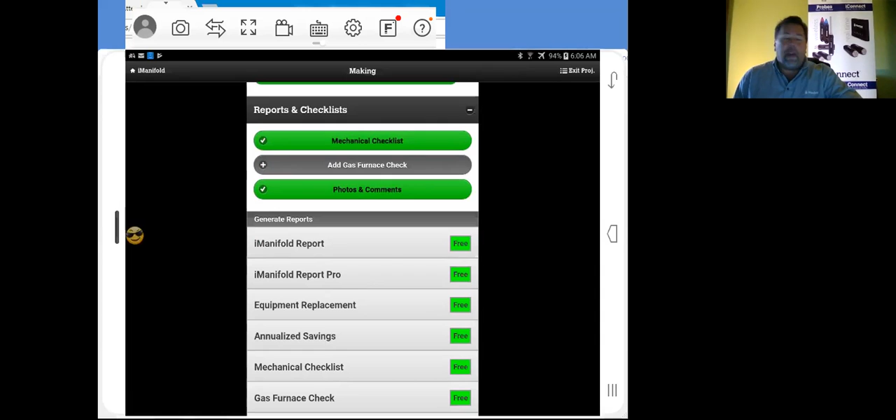Showing performance is another page in your offers here. We'll take a look at an iManifold report. Now, this is just a basic report that you can show to your customer.

As you can see, you've got measurements in and measurements out. Measurements in are basically what the system was doing when you arrived on the job site. Measurements out are after you fixed it. So you're going to want to show your customer measurements in for when they're taking a look at it.

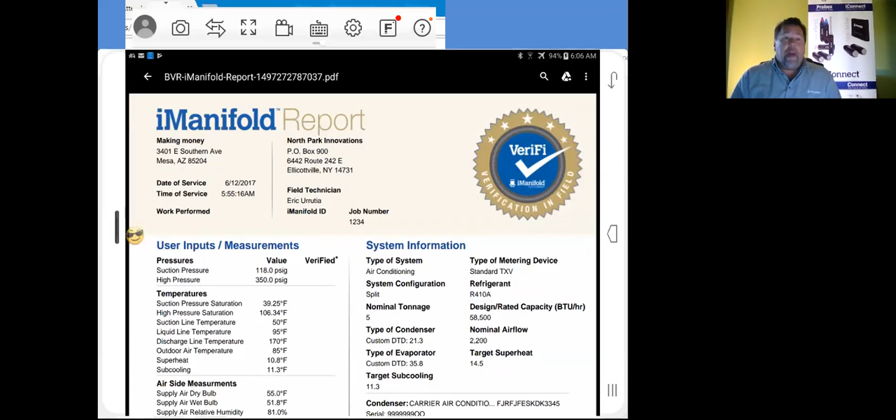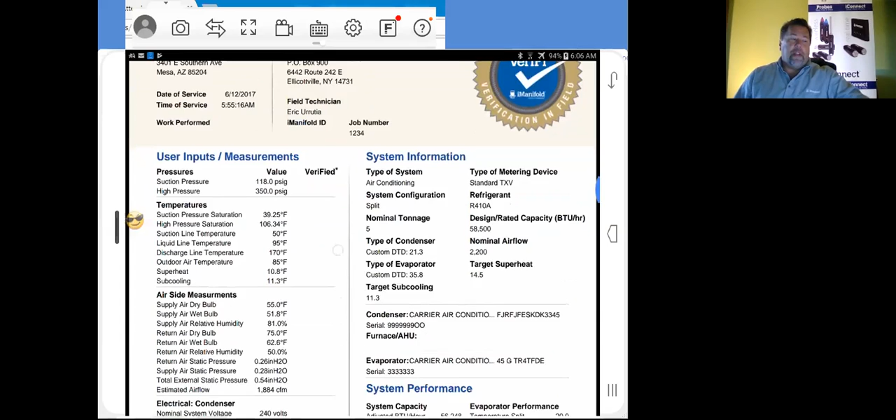We're going to generate this report right quick. Here's your report. Now, I generated this without being hooked up to a system, so all the way down this line on verified, you're not going to see check marks. Hooked up to the iManifold or iConnect, you will see those check marks there. But as you can see, all your pressures, your temperatures, air side measurements, everything's there. The proof's in the pudding.

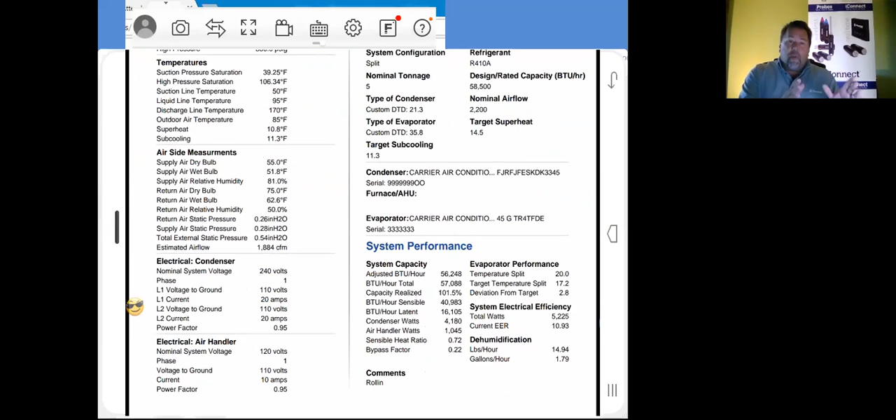It's not just a technician scratching something down on a pad or at the base of the invoice. And we all know the proof's in the pudding. If it's done professionally, nice form, people like to see that. It's a lot more professional and a lot easier to look at.

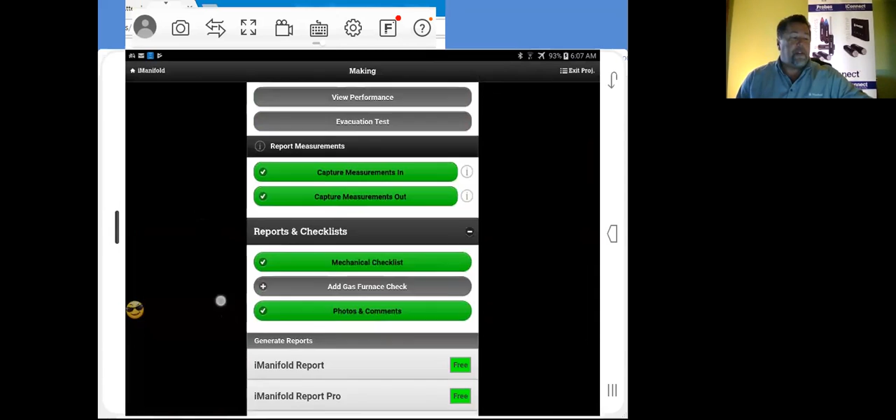We're going to go back into another nice report. This is where it comes into play, showing what you did, how you fixed the system, and what their system's doing before or after. We're going into the charge and airflow report. It's a very simple, nice, personalized report, and you can put your logo on it.

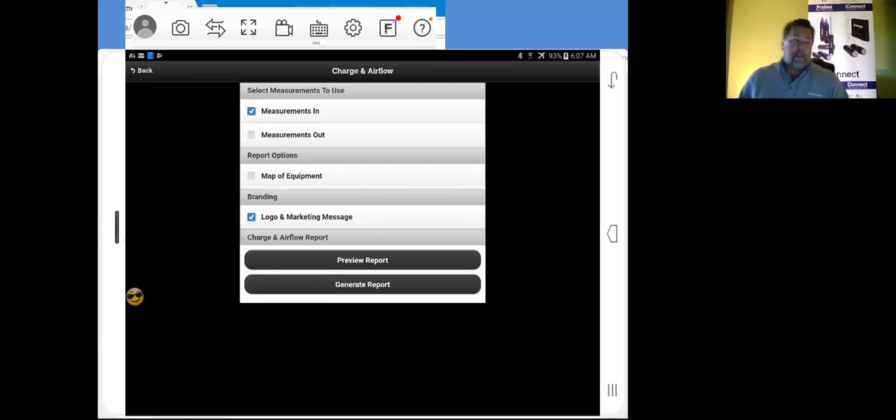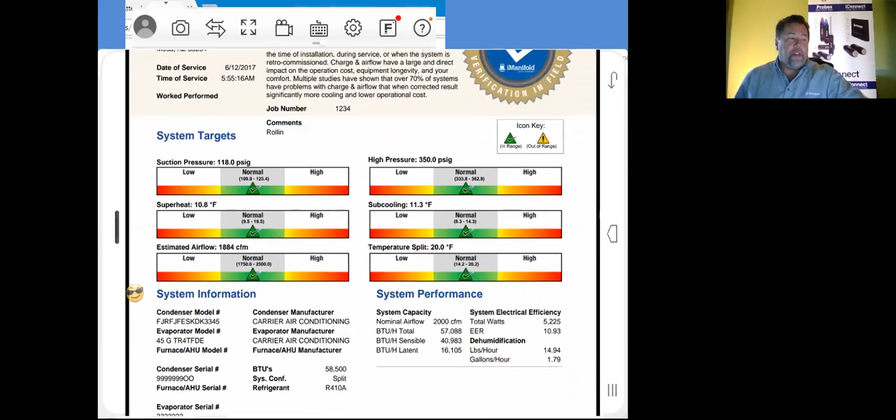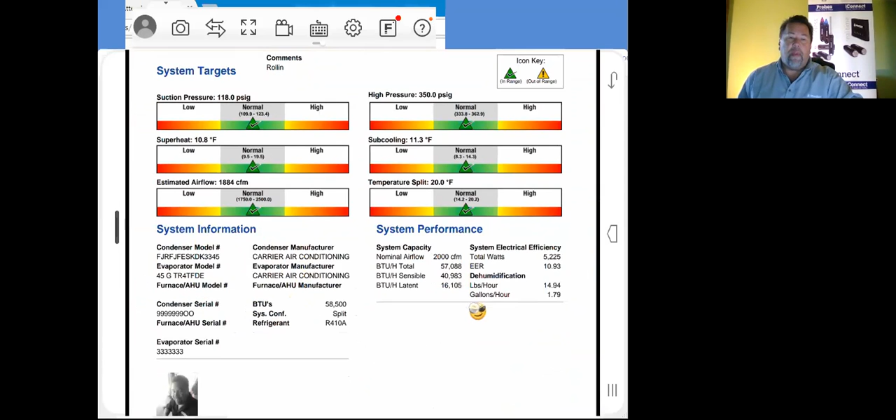We're going to take a measurement in. This is when the system wasn't running so great. That's how quickly these reports generate. As you can see, the system was running really good. All of your measurements here are falling within the norm. There's all your model and manufacturing information. Your system performance is also shown, and you've got your serial numbers and everything in here.

Now let's go back. Probably one of the best reports we have that will make you money is the equipment replacement report. Equipment replacement reports take your measurements in and your measurements out after you've done a tune on the system versus replacing the system. So let's take a look at an equipment replacement report. We're going to generate this right now.

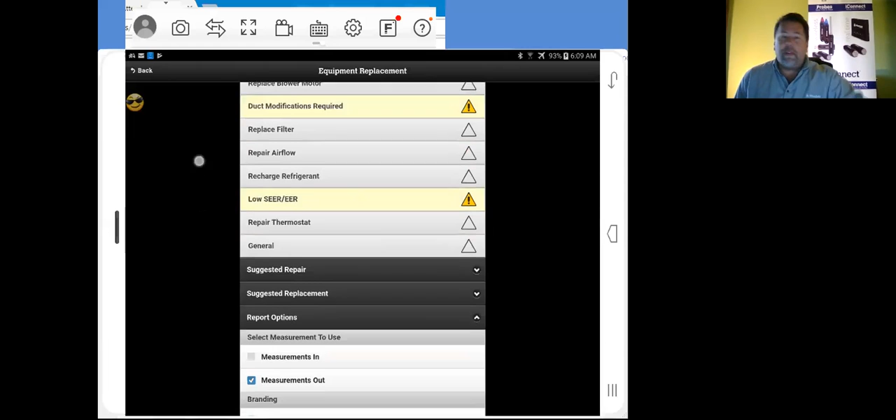Problems are listed up at the top here. You've got a whole selection of what you need to do. You're talking to your customer even after you've tuned it, saying, well, you've only got a limited amount of time on your AC, we need to repair that, we need duct modifications, and we've got low SEER or EER. That's contributing to why your system's not running that great. Then there's the suggested repair.

Now the SEER after the repair, we all know it's not going to be back up to par. We'll just say it's going to run at 8. What is the repair cost? You did a capacitor, a few things that you tweaked around a little bit to make it run a little bit better. That repair cost, we'll just say it was $900, and that's actually pretty light for a decent repair.

Now our approximate unit age, this is going to be a telltale thing as well. We're going to put in that this unit is 12 years old. As we know, most of the time, depending upon your part of the country—here in Arizona—systems run between 10 and 15 years at the max before they're just deteriorated.

Now we can go into your suggested replacement. This is where your technicians, if you have sales books, go out on the job—if he's going to upsell them, sell a new unit or what have you—he'll have most of this information in his sales book. So we'll go to a recommended SEER of a high 18. Select your manufacturer—we're just going to use Carrier as an example. Model number: put in whatever model number here and match up your tonnage, or if it's going to be upsized or downsized, depending upon what was there already.

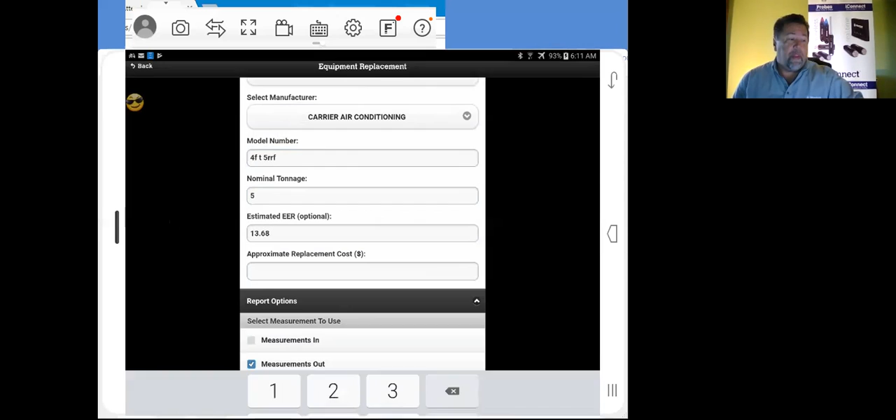Replacement cost: we're going to go $10,000. We're going to go off the measurements out, and we'll generate this report.

Oh, I've got my smiling face over here—that would be your actual logo that gets put in right here. Customer information right here, your company information right here.

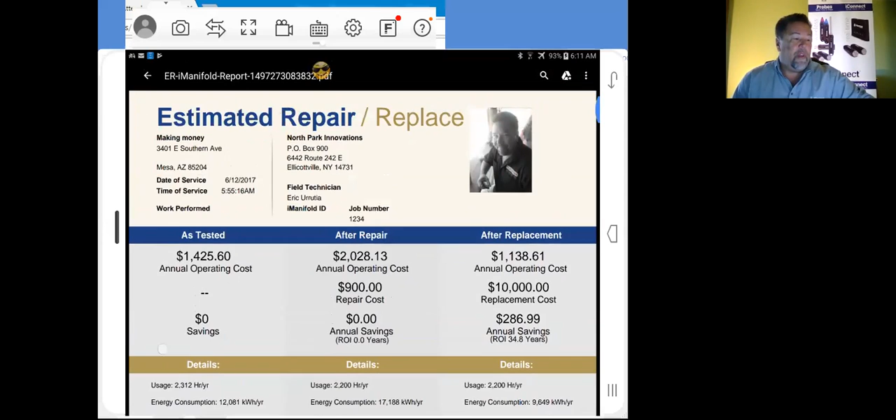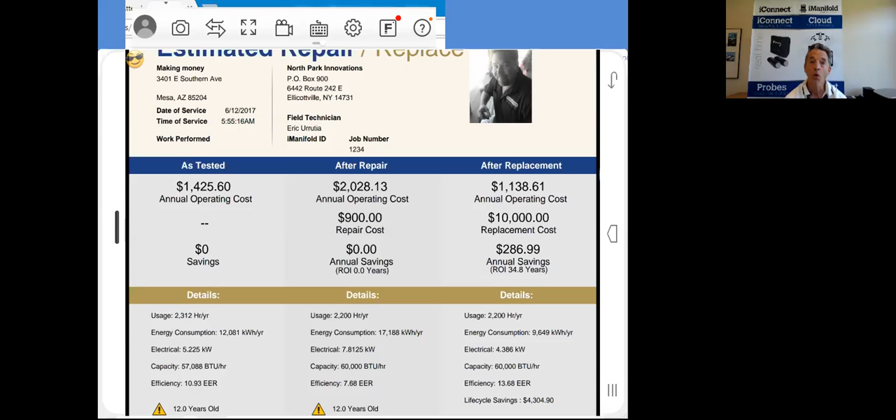Hey Eric, there's one thing we want to stress to everyone, because there's been some feedback that there's a lot of people in the industry all about trying to upsell. Yeah, and the beauty of our system is you can really quantify the operation of the existing unit as it is today, and then project what the new one will be. So it takes a lot of the unknown out of it for the end customer. We think it raises the bar a little bit as far as the quality of the sale and the promise of what you'll receive.

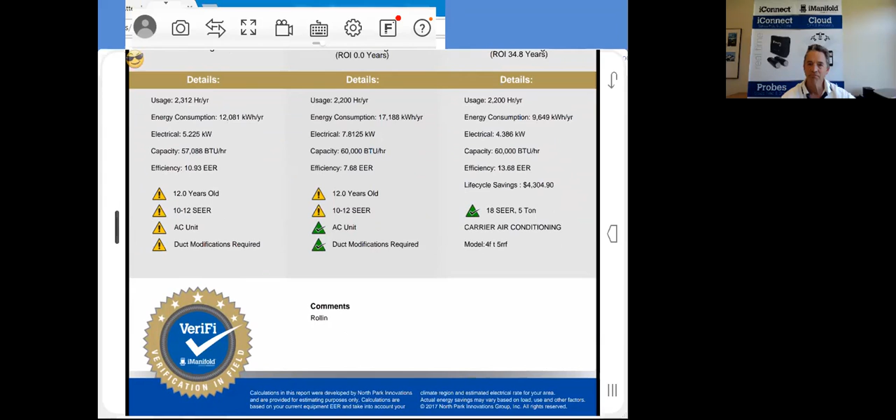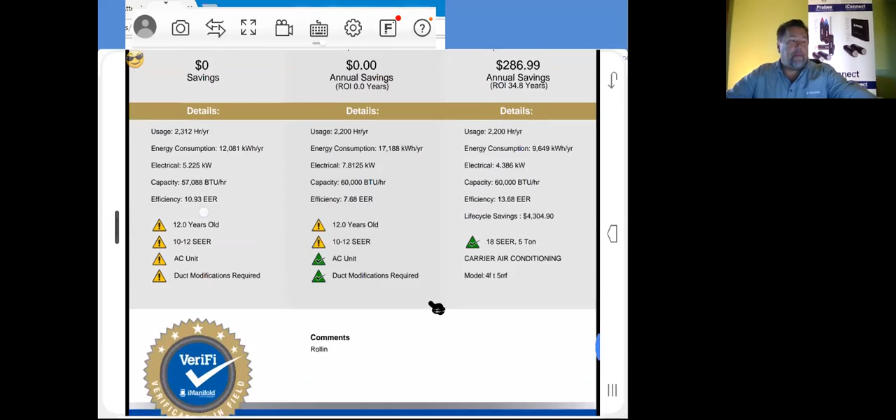Correct. But on this report right here, it is showing—let me get back on here—exactly what we've got. Now I just threw some measurements in here, of course: as tested, after repair, after replacement. When you're actually working on the system, I just threw in numbers here. You'll be able to see as tested, after repair, which is actually going to be better than as tested, and then after replacement, you're better than as tested when you started off. So with this, showing the customer how much he's utilizing right off the bat.

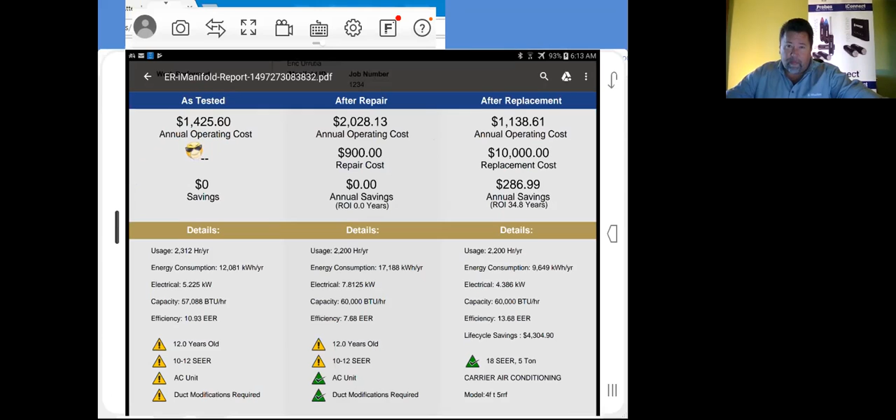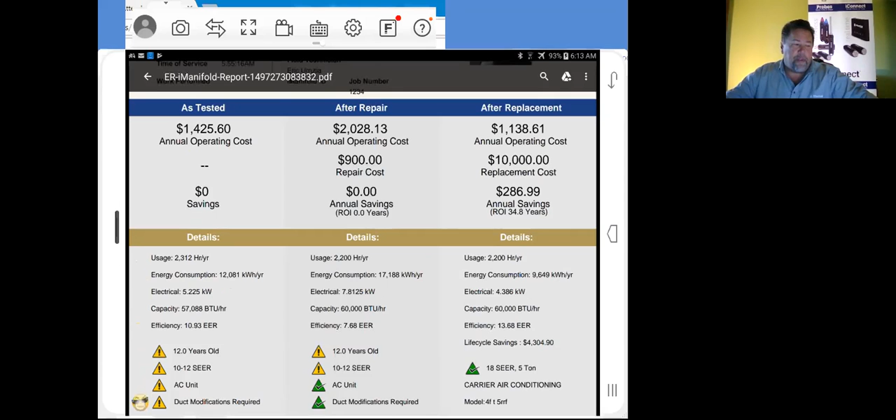Now our next session, I'm going to hook up to a system, make it run inefficient, then we'll put after the repair and then after replacement, so we'll have better info. Sorry about that, everybody. But showing the customer where they're at, and then after replacement, these are your benefits that you have here, your details, your energy consumption on this. And so that's a good example, Eric, where it shows, hey, it's a 34-year payback. So you do well to fix it.

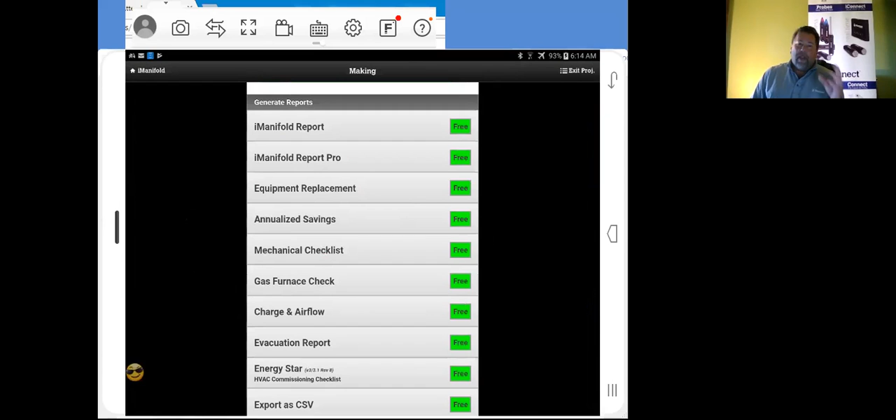Yeah, and normally, like I said, with proper measurements in there, sometimes it's going to be a 34-year payback, sometimes it's going to be a 10-year payback. Right, just all depends. Just all depends.

Now, there's another report here for annualized savings. This is a really nice example when you just did a repair for a customer. They had some pretty catastrophic things go wrong, or even the slightest little things go wrong. We can take a look at annualized savings.

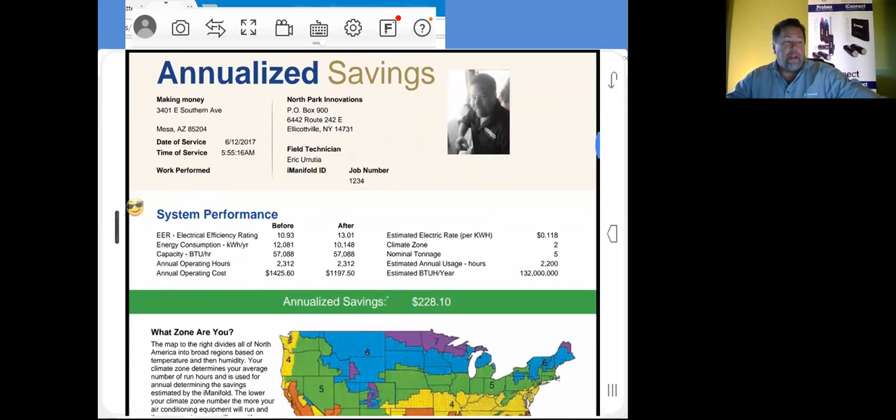The annualized savings report here shows where your system performance is. Before, we're running at 10.93 on the EER. After the repair, we're at 13.01. Annual operating cost was $1425.60. After the repair, it was $1197.50. So annualized savings, we're looking at $228.10 on this particular one.

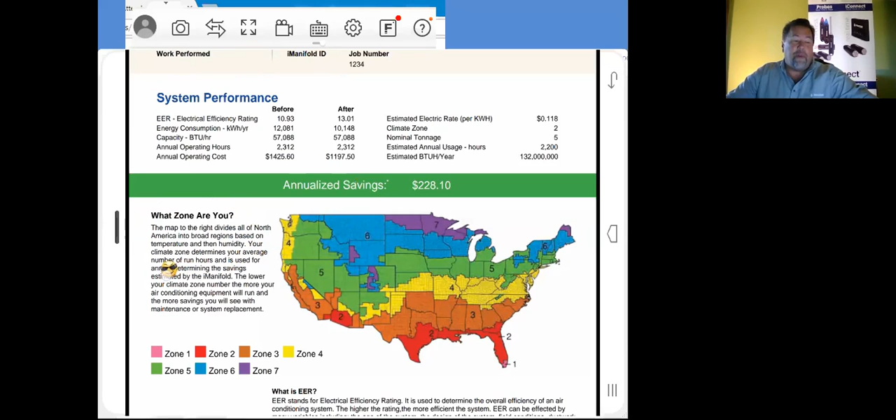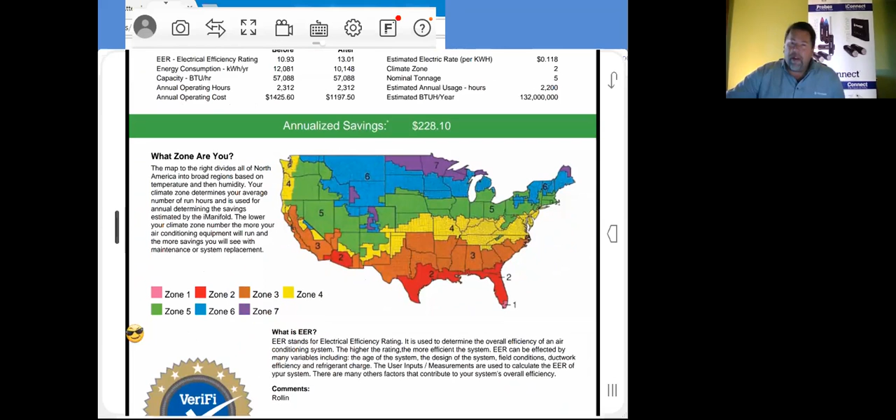Now, mind you, I'm going to have a better example next time around. I apologize, I threw in some numbers here, and they weren't exactly the most accurate numbers by any means. But this will give the customer a little information of what zone they're in, so they can take a look at where they are on the map, and also it gives a brief example of what is EER, so they understand a little bit better. We're just giving enough information where they can be a little bit dangerous.

Let's go back in here. Now here on the bottom, you'll see there's an export as CSV. This is really nice because if you're using some dispatch software, whether you're a Service Titan guy, ESC Desco, there's several different ones out there, or even if you're using your own, exporting this information as CSV, this is a Microsoft Excel friendly file.

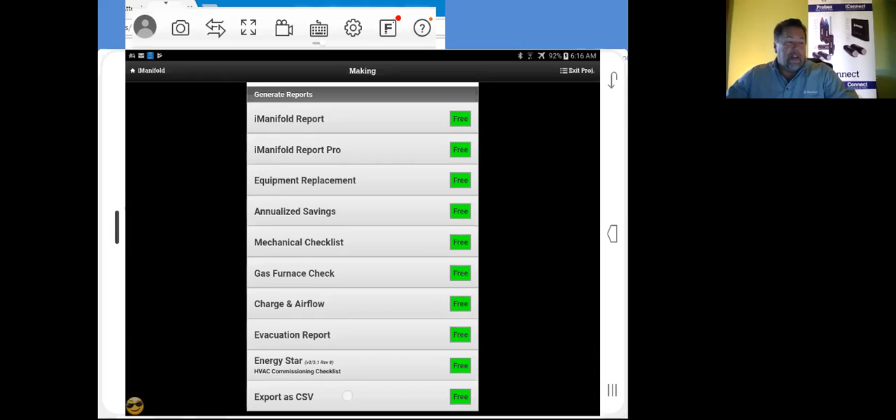We'll take a look at this real quick. We've got a choice between measurements in, measurements out. We'll just say this is after we did a little repair job on it. This can be imported onto your actual tickets or invoices that you're sending to the customers, and you can save it for your information as well. I know this might look kind of funny, but this is going to be the information that gets sent out.

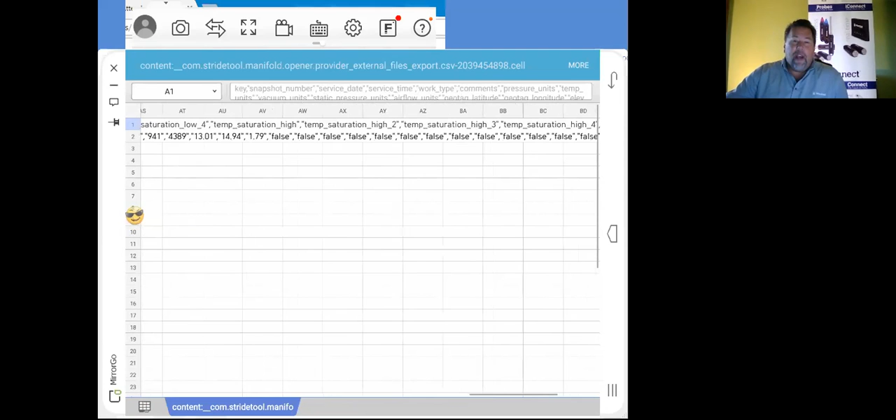We can expand on all this. All this information up here has a meaning, and it can be imported into your system. All these measurements, your geotagging, everything gets imported into your software. So those of you that are IT guys, that's an easy one for you to take a look at.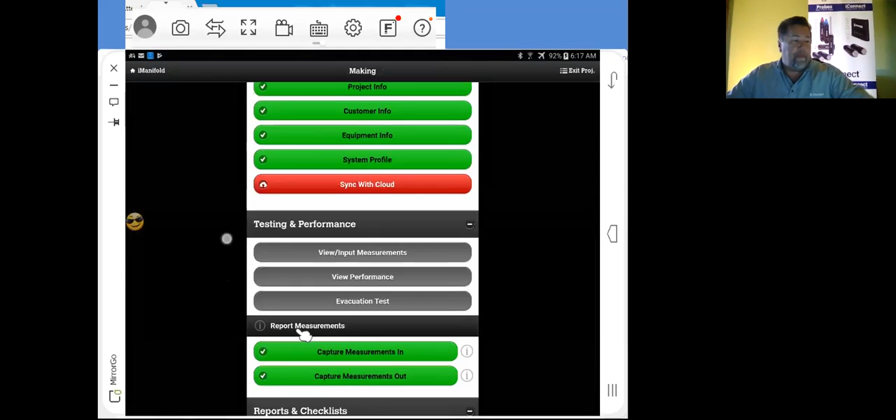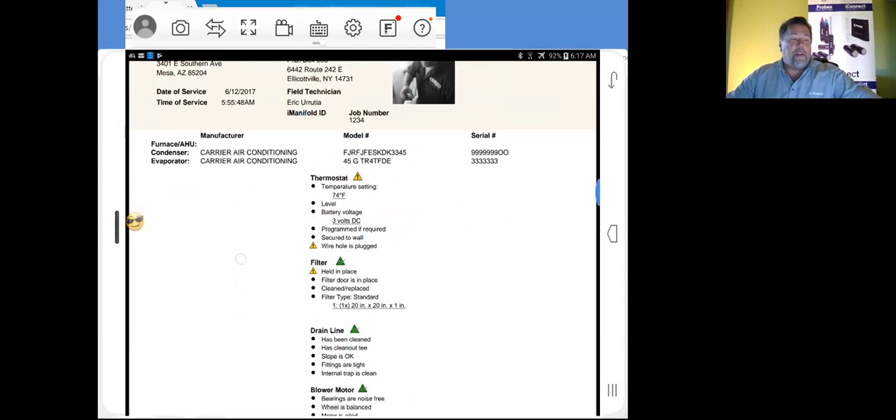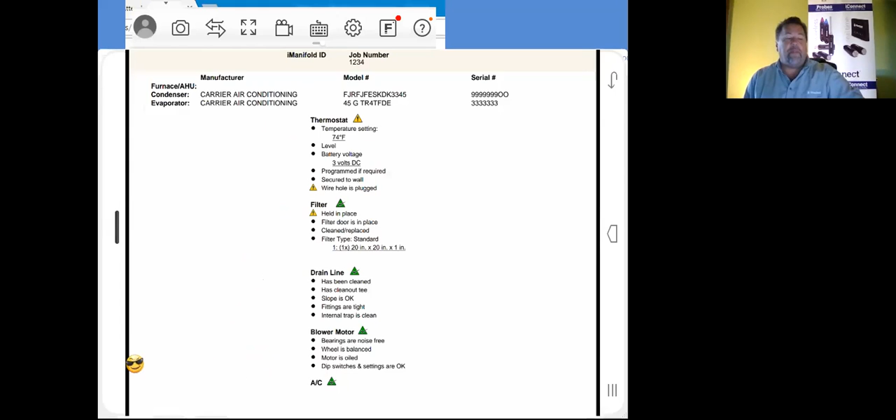We also have a mechanical checklist report. This basically goes over everything that's inside the building. I just did a little example using carrier information, made up a model number, put in the serial numbers. This is going over the thermostat, the filter, the drain line, blower motor, and a bunch of other items on here. You can go through quite a few items.

That'll give the state of the system inside and out, from the looks of the furnace, the heat pump, the AC, line set, filter sizes. As you can see, we've got our filter sizes in here. If there was a belt on the air handler, it gives you the option to put in the size of the belt and the number of belts. That way, for maintenance and everything else, you know exactly what's in that system before you ever even go back to it.

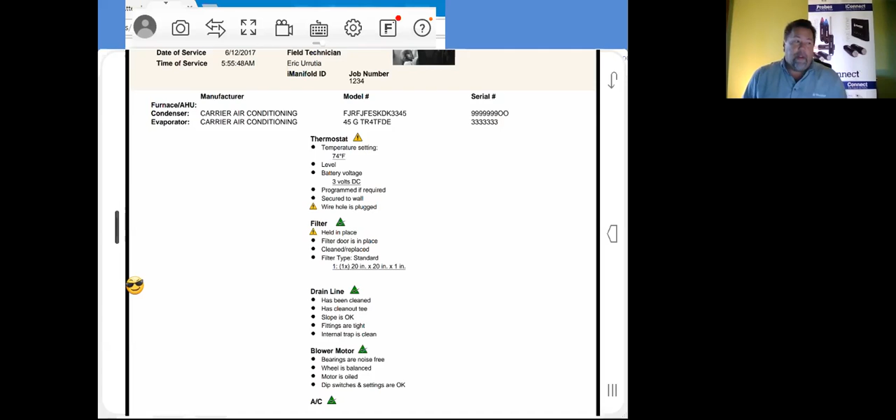Very nice thing there. Now, the way we discussed before, the beginning of this, how the iManifold can actually pay back, it'll pay for itself in a very short amount of time. And also, this is where it's going to generate you the most money.

We're going to talk about callbacks. Callbacks are a major issue that you have in the service industry. Callbacks cost you a lot of money. You can all think about how much a callback will really cost you. A lot of contractors don't even know. If they're a medium-sized contractor, they don't pay attention to it. They just send their guy right back out, get the job done, fix it, move them on.

Well, how much did that actually cost? Figuring the cost of his hourly wage, the truck, the insurance. The main thing is the lost revenue of the job he could have been doing instead of going back and making that call. So these run into several hundreds of dollars for each one of these callbacks. But the contractor most of the time will not even really feel it because he's not pulling money out of his wallet, wadding it up and throwing it in the trash can or setting fire to it. At the end of the month, he's just like, well, we had a decent month. And there's a lot of them that don't pay attention to it at all.

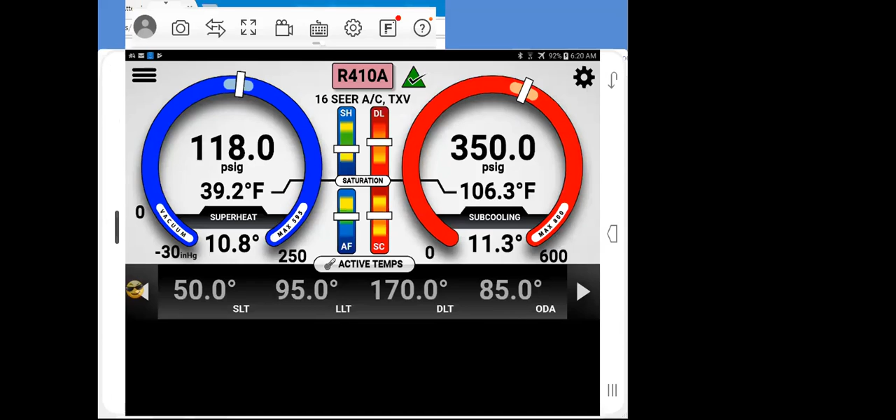Hey Eric. Yes. We have a little technical problem here. Let's hold on one second please. I'm afraid a lot of people have lost connectivity, and I'm not sure why. Can you run back in? Yes, what's going on? Oh, he's back on. Nick's on now as a panelist. Bill's not on. Yeah Laura, I think a couple folks have said they're still connected. Okay, very good, thank you. Okay, well good, yeah.

All right, so the technician you've got out in the field - he might not be the greatest technician, but the last thing he's going to want to do is make that phone call and call in to his boss and say, hey, I can't figure this out, I need some help out here. Well, he calls into the service manager or you, whoever.

You've got to stop what you're doing, get up, get in your truck, drive out there. Depending upon where you live - we're in a metro area over here - the technician could be out in Goodyear or Buckeye. You're looking at an hour and a half, hour and 45 minutes just to get there one way. The customer's out there waiting, wondering what's taking this guy so long. Next thing you know, you come pulling up and go over there to help out your guy.

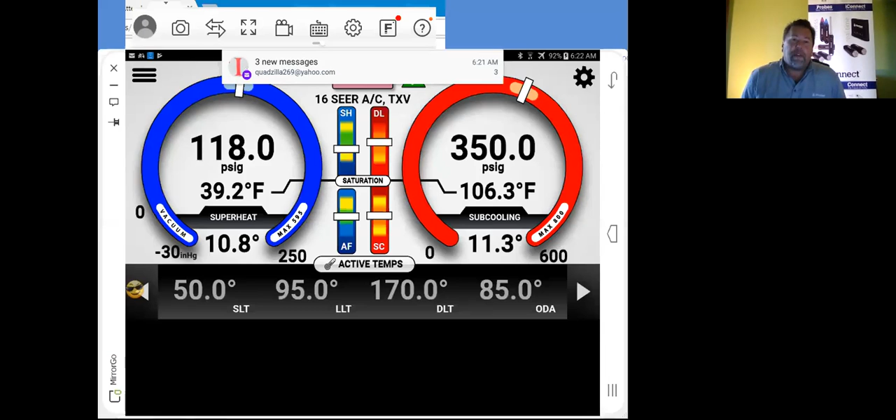Well, your technician, he's a little scared of course. He's a little scared of the whole situation. You've got to come out there and help him out.

Now the customer sees this also. Things that are going through his mind go through your mind as well - who's this guy, why is he here, was the technician that came out competent in the first place, how much is this costing me? Those are all the questions going through somebody's head.

With the iManifold and iConnect systems, we can use a thing called Tech Connect. This little tab right here - what Tech Connect does is it allows the technician out in the field to make a phone call to his superior or one of his coworkers, basically a super tech per se. He can make that call and ask for help right there. If you're in the office and you're his go-to guy, he can call up and say, Bill, I need some help over here. Well, Bill just says, stream your data. The technician can start up Tech Connect, stream his data, go ahead and start it.

He's streaming his data from where you're sitting, Bill - you could be anywhere, really anywhere you have service. You take a look, refresh it up, and look, there we are live. We connect up. Now, Bill is in New York, I'm in Arizona, and here we are. This is what Bill is seeing - he's seeing my screen right now as the system goes live. Now, of course there's going to be a short delay, about 1.5 seconds, but nothing that's going to be detrimental to what he's viewing.

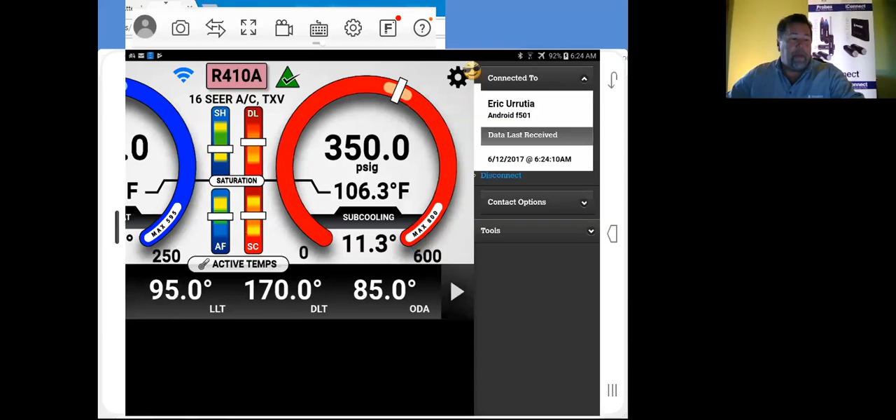Now I just went back in, and as you can see, we see Bill Northrup is live right here. We can connect up to Bill. My gosh, Bill, what have you got going over there? Well, you know. But as you can see, it's very nice to be able to be on the job sites - it's just like you are on the job site with your technician.

Now, mind you, we can have a phone call going at the same time - a Skype call, FaceTime, depending upon the system you use. And it's essentially having a superior tech, the boss, whatever you want to call them, right there on the job site to coach you through it. If there's a second set of eyes needed, there's a lot that this has to offer, because let's face it, at the end of the day, you work out here in Phoenix, it's 110 out, you've been crawling in attics all day, you're going to be a little weary, a little tired, and this could help you out a lot.

This could help out a lot. Now, the menu options that we have while we're connected, I'm looking at Bill's screen here on our regular bar side menu. I've got a choice to disconnect. I can view the profile that he selected, if any, and I can take a look at the performance of the system so I can get all that data.

So if I look at profile, you didn't put a profile in there. No, I didn't. I just brought up what I had. And see, you're not really getting a whole lot. You just threw in R410A demo data. Yeah, exactly. That's what's there.

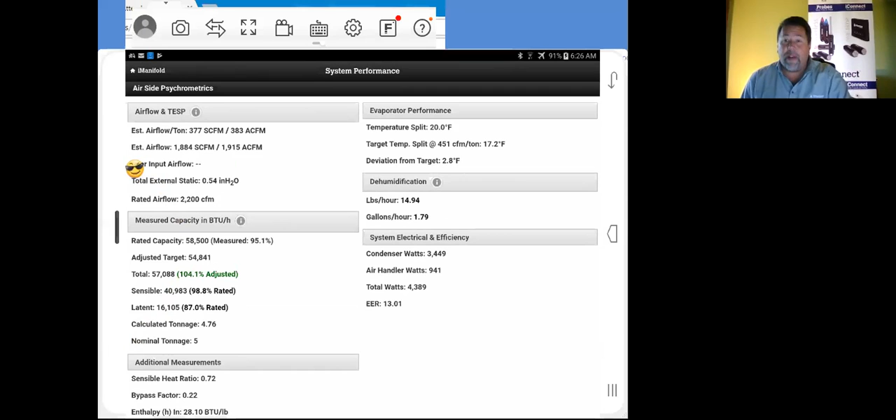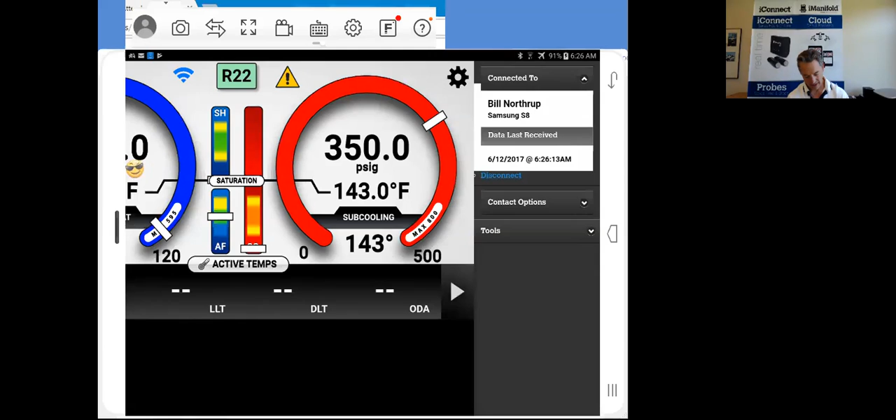And you know, I'm gonna go ahead just for fun here. We'll restart and see what we get. Okay, now it should be that I've stopped. Is that what you're seeing? I'm still seeing that you're okay. You're streaming data right now, are you not, Bill? I'm just going to refresh it. Okay, see what you get. Yeah.

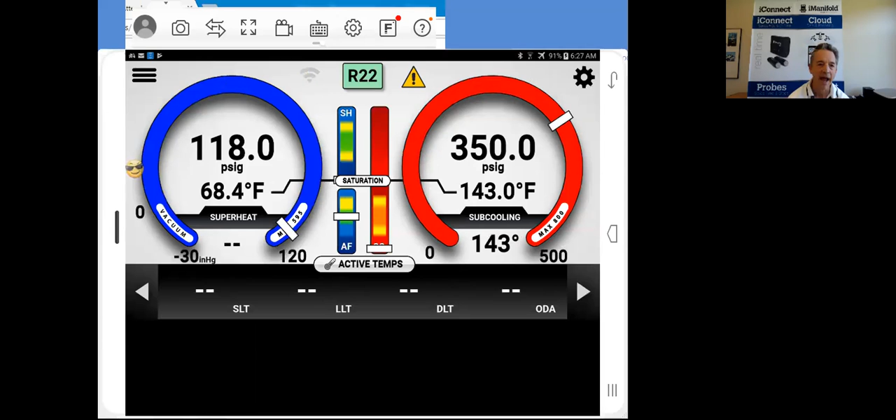Definitely. Yeah. But going from the iConnect side there, this is 100% value as far as nearly eliminating your callbacks. When your technician has the availability to fix something because he's not very well versed on something, make that call. There's a lot of time, think about your seat time in that truck as well. You're not going to have to drive out to his job site. You've got his confidence building back up because he knows that you're not going to get upset, or your manager's not going to get upset. Anybody's going to get upset really if he's got a little issue out in the field.

Because with this, there's no getting in the truck and driving anywhere. The customer over there, he doesn't even know that this call was ever made unless your technicians are right in front of him. So there's no other people having to come out. There's a lot of time saved, and he's going to get it fixed right the first time. First time around, it's always the best. And the best advertisement in the world, that word of mouth, that goes a long way.

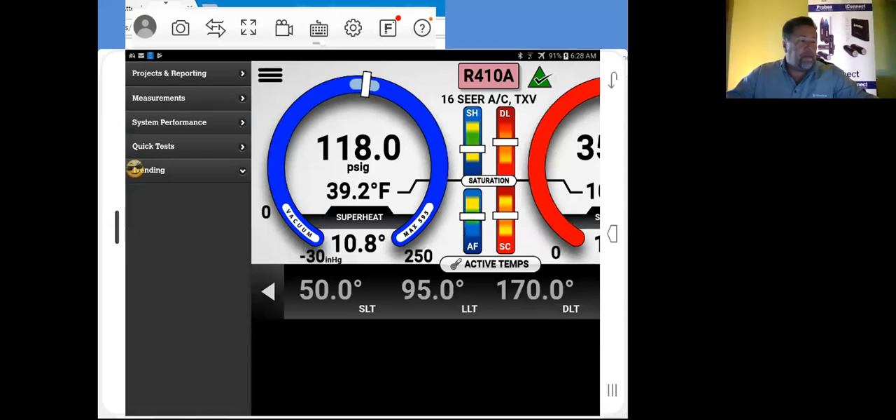Now let's see here. Stop sharing that.

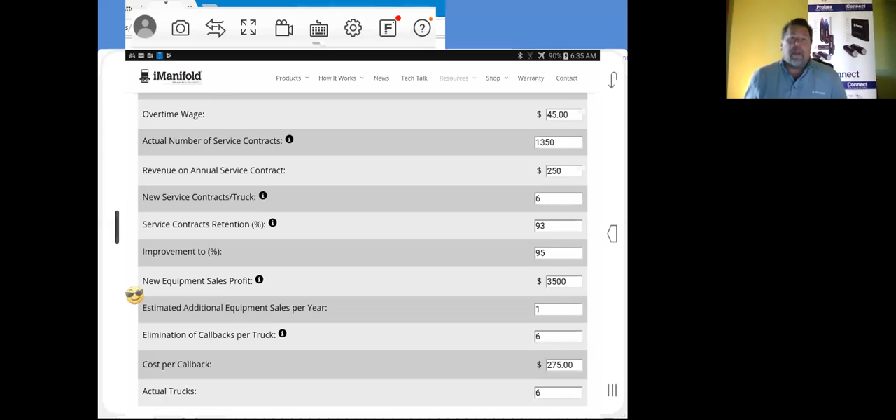Hey, Eric, why don't you just do a demonstration so people can see the changes, for instance, make some changes based on what's there, and then see the results. Okay, well, might be interesting for people.

The hourly wage, $30 an hour. Overtime's 45. Actual number of service contracts, that could vary by the company, we'll leave these defaults in here. The revenue on a service contract, $250. New service contracts per truck.

They've got a 93% retention rate on their service contracts. 95% improvement. New equipment sales profit. Now, this could definitely change considerably depending upon where you're at.

There's a common one right there, additional equipment sales per year. Yeah, that's a nice low number, right? One per year. That's pretty cheap. But that's fair, it's a nice conservative number. Put two in and see what happens, right?

Elimination of callbacks per truck, depending upon how many callbacks we're gonna have. Low number is 6, we'll keep 6 on there. Now, cost per callback, let's face it, $275 a callback. Think twice about that, because when you actually factor in the wages and your time, that's where the callback cost comes into play, all that money comes in. $275 is light. Customers I've spoken with, I asked them how much does a callback truly cost you, and it's upwards of $600, because it's the direct cost, but then there's the cost incurred as a result—they're not on a money-making job, that's your asset, and it's not deployed to make money. Now I'm even going below the norm with 450, and we'll just leave this at an actual 6 trucks in here. Now let's calculate this.